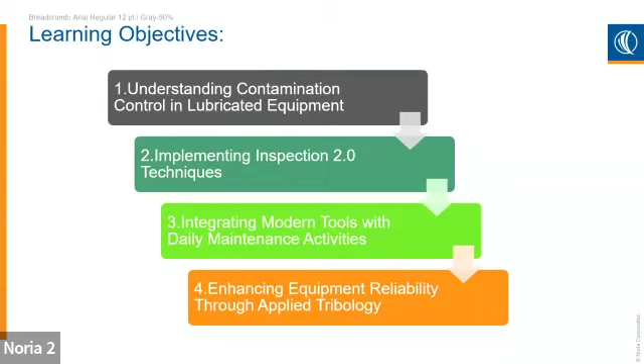One is simply understanding the role of contamination control. Contaminants, how do they impact machines? Next, I'll talk about what this Inspection 2.0 technique is about. Then I'll jump into integrating modern tools, everyday tools, things we can use that are in our own pocket that can be impactful and bring the next generation into these industries. And fourth is seeing how this plays a role in the overall reliability space, how applied tribology has a role.

But what is important for that next generation? That's the question. The next generation being those entering the workforce, or maybe have been in the workforce for 10, even 15 years, but are still transitioning to figure out what it is they want to do. How is it they want to apply themselves? Even those who have been through degree programs or trade programs, do they actually have the skills necessary to complete their job? Are they happy with their jobs?

We're going to have a need, and it's hard because that type of workforce isn't readily available today. Right now it is an average of 44 days between finding, looking, searching for that particular hire and actually hiring them. So that's the average, 44 days. And then you have to decide whether or not that's going to fit correctly.

But what is that next generation looking for? They're looking for, in their possible career, things that can help control their schedule. They don't want the wild cards of what's going to impact the uncertainties. Of course, they want safety. Safety has always been a critical component. We don't even recognize it until there is an event.

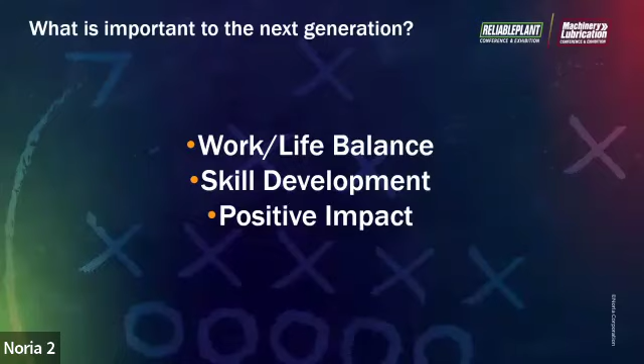This was a keynote session presented, like I said, to recognize the important need of our industry to see the needs that are different with the next generation, different than what was in the past. 50% related to work-life balance—50% of job seekers rank this as the most important.

That means when they're looking for their next job, whether it's pay, who the manager is, or the type of work it is, 50% of them said the most important thing was work-life balance. Making sure they had enough time to be with their families and have control of those components. The next one here was skills development.

63% consider this essential to career success, building their skills so they have something they can leverage moving forward. And that includes certification. Manufacturing workers who earn an industry credential, let's say a lubrication credential, earn $2,000 US dollars more annually and are more likely to be employed than those who didn't earn a credential. Think about that, and add that to every possible credential after that. That's a big deal for people to have that opportunity.

Reliability is a big part of this, and that's why I want to tie this keynote in. Reliability is a big part of this because technical advancements, technology can help with them adopting these tools, and specific certifications relate to that future growth.

So that's the third thing here: positive impact. 70% consider a company's social impact important. Again, reliability impacts this—reducing waste is a big component of this, especially when you look at CO2 emissions from what we're doing in industry. If they feel the role they're in is going to reduce that, they're going to feel happier about their job.

So what does that have to do with tribology? Why am I going on this tangent about the next generation in the workforce? Well, tribology does have a way of answering this, and I'll go back to what Noria does and why we even exist. Noria was founded on the premise that every plant, every facility, every mine site has a hidden plant that must be found. A hidden plant—I'll explain that in a second.

Actually, I'll explain it now. It relates to being able to uncover what things are being done every day, or money being spent every day, that isn't really amounting to any impact on the facility or any positive change on revenue. When the company makes more money, everybody else makes more money—producing more, faster, whatever it might be. If we can discover those waste components, reduce them, and increase the overall averages, then we're essentially producing a multiplier of what the facility currently is or was.

Could be times two, could be times three. We have case studies—I've seen this play out over and over, uncovering what's considered a hidden plant. Also, maintenance is the number one controllable expenditure in the plant. I'll talk about that a little bit.

Lubrication, or lack of lubrication, or the things that impact lubrication—this is the world of tribology again, applied tribology—is the number one cause of machine wear. Contamination and lack of proper lubrication is the number one cause of wear. I'm not just saying that—you can talk to any of the manufacturers of bearings, pumps, motors, gearboxes. They'll say the number one reason their components fail is due to some sort of mechanical wear, and the majority of that is contamination or lack of lubrication.

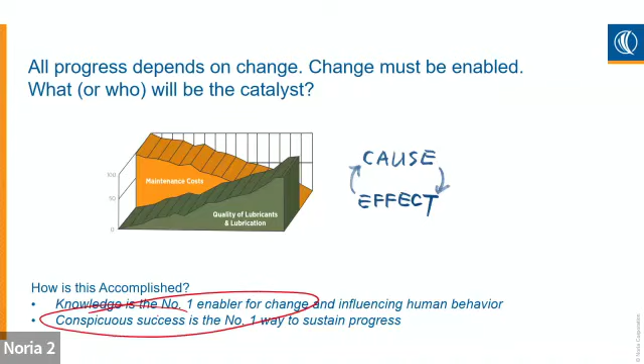Once you have success, the last thing here is about conspicuous success, and you see that down here. I think this gets underplayed, misunderstood. Conspicuous success means presenting your findings. When you have success with something, even small changes, this is important for the next generation, seeing the small changes, making sure everyone's aware of it. Because if it's not showcased, then there's not going to be the additional investment of time and resources to make that grow even further.

I'll explain some scenarios about that coming up here. But that's the long game and how to keep things sustainable. Showcasing that conspicuous success is the number one way to sustain a program.

So take a step back. Let's talk about tribology for a second. We'll have a little bit of a Tribology 101 course, and then we'll get into contaminants, contamination control.

Tribology is the study of lubrication, friction, and wear, and the lubricant is reducing that friction. But let's not forget, friction is also considered a good thing at times, like the way our tires brake on the road and keep us from sliding all over the place. That's friction that we like.

But at the same time, as you're driving, you're experiencing drag, all the air around you slowing you down. That's something you're trying to reduce. So friction's both a good and a bad thing depending on the context, and we just need to recognize it as part of the equation.

Understanding that friction exists and lubricants can help, what else impacts that? Well, it's impacted by the motion, the type of speeds, whether it's sliding or rolling motion, the temperature. As temperature goes up, the viscosity goes down, the oil thins out, and that's a big deal. The load on the equipment, the overall operating environment, the shock loads, and the type of lubricant and the way the lubricant's being applied.

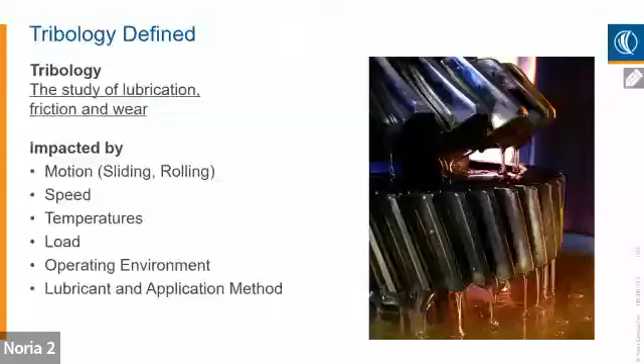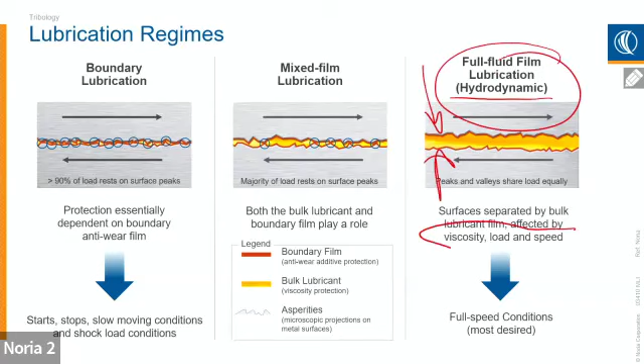When there is lubrication in practice, the most effective form of good lubrication is what we call hydrodynamic, or there's also elasto-hydrodynamic lubrication. When that occurs, you have full separation of components. These surfaces are moving relative to each other in a careful balance between the viscosity and the load and the speed.

But under certain scenarios where the speed is too low, or the load is too high, you're going to have a collapse of those two surfaces. The viscosity can't really do enough there, so in exchange you're working with the additives, the wear and friction control additives. If you've ever heard of anti-wear additives or extreme pressure additives, these are the type of additives that protect and provide what we call film strength.

Film strength is how the lubricant protects surfaces by means other than viscosity. That's also known as boundary lubrication, where these additives, anti-wear additives, play a role. They don't prevent friction altogether, but they help reduce the effects of it.

Now, all the while, you see that these surfaces aren't perfectly smooth. That's totally normal. Under these conditions, the gap between these surfaces is at a size we can't even recognize with our own unaided eye. We're looking at 1 micron or 2 microns, or half a micron in rolling element bearings. We can't see things individually without a microscope or something, that's less than about 40 microns.

We can't even picture it—our hair, for example, is about 80 microns, so it gives you an idea. We're talking about something almost 1/100th of the thickness of our hair, and that's the film thickness that is protecting our machines. It's the difference between having perfect lubrication and a machine that's smoking, burning, frying, and leading to immediate failure, based on a lubricant at that depth.

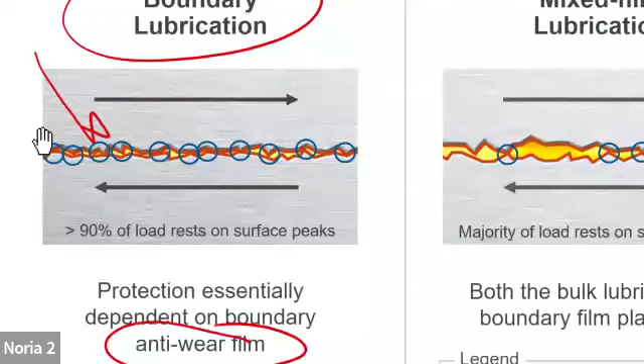The solid, maybe dust and dirt that's even in this room right now, we can't even see because of that same reason. It's too small, but it's still bigger than that film thickness. So it gets into that oil, and this is happening blind to us. Yet it's causing this sandpaper wear, wearing down of the machine surfaces, and it leads to wear. So we have to recognize that and provide good lubrication to overcome it.

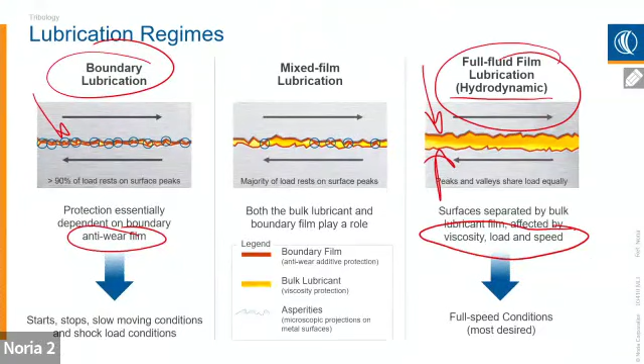So things like good lubrication, things like contaminants, and then the need to control that. Those are the top reasons why machines fail. I'll jump ahead a few slides here and show that. The Pareto principle, if you've ever heard of it, is also known as the 80-20 rule. It's used in a lot of different ways.

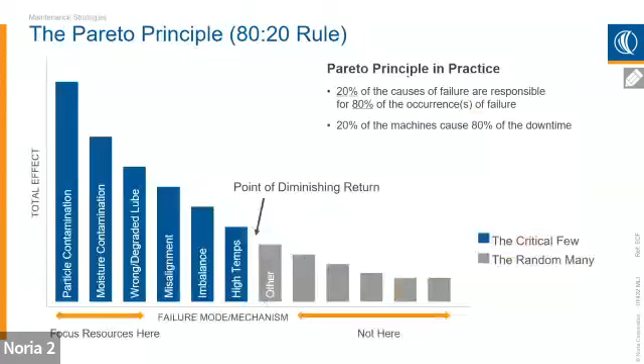But one of the most impactful ways it's looked at in our industry is that 20% of the causes of failure are responsible for 80% of the occurrences of failure. Of all the reasons why machines fail, and that's actually shown here in blue, 20% of those are responsible for 80% of the occurrences.

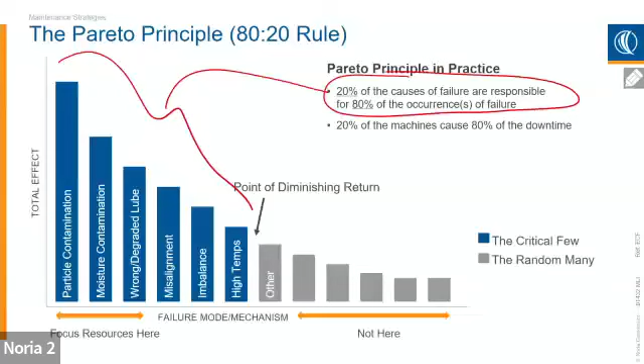And across all those averages, it adds up to being particle contamination, moisture contamination, wrong lubricant, degraded lubricant, and then eventually misalignment, imbalance, and the list goes on. There's eventually things that continue to add up to other reasons why machines fail. But contamination's there as number one, and then lubricants right there behind it. So I say that because it is necessary to observe that as a root cause of failure.

Now, many of you, I'm not sure what all your roles are in your organization, but I have to imagine you have a familiarity with condition monitoring and the several technologies out there to monitor the conditions of our machines to predict when machines will fail. That's predictive maintenance. Predictive maintenance, like vibration analysis, and others like thermography, acoustics, motion amplification, are all very critical at telling us that the machine is experiencing a failure mode.

But that is also the problem. It's telling you when there's a failure, not necessarily what will lead to a failure. And so that's what leads me to talk about, if you haven't seen it already, something called the P-F interval curve. This P-F interval curve represents the time domain between the time in which the failure is first detected and the functional failure. The functional failure is when the machine is not able to really do its job anymore.

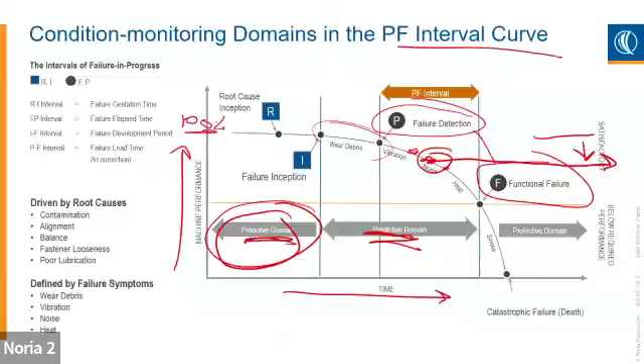But ahead of all that, lubrication can also be the answer, because proactive maintenance in this proactive domain is different than the predictive domain. Predictive maintenance looks at the failure in progress, but the proactive domain looks at the root cause and attempts to fix the root cause before the wear ever begins. So proactive maintenance is root cause oriented, meaning we're looking for particle contamination. We're looking for changes in the fluid properties that, if we leave them that way, will eventually lead to wear.

If I were to take that pump, which let's say is perfectly lubricated, and I take a glass of water and pour it in that pump, it's not failing immediately, but it will lead to failure eventually in the near future. But if I were to inspect a sight glass, let's say, and see that there's water in there, I can fix that before that ever happens.

So that said, this is all different types of wear and friction that can take place. But what are the economics behind all this? Where can the next generation capitalize, using tribology to their advantage? Well, a typical maintenance budget, there's a lot of different things that go into it. But the biggest part of it is the maintenance, labor, and repair parts.

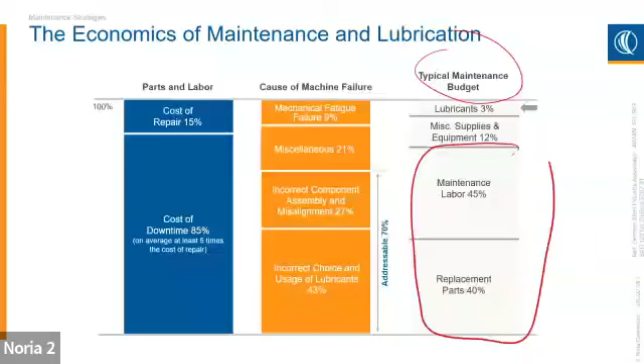That labor and repair parts are a big cost, but the majority of the impact of that failure is the downtime. On average, the downtime cost is at least 5 times the cost of repair. And so you have this maintenance budget that's significant, but at least 5 times that is the downtime. Well, why are these machines failing? Why does it lead to the need to have repair parts and maintenance available?

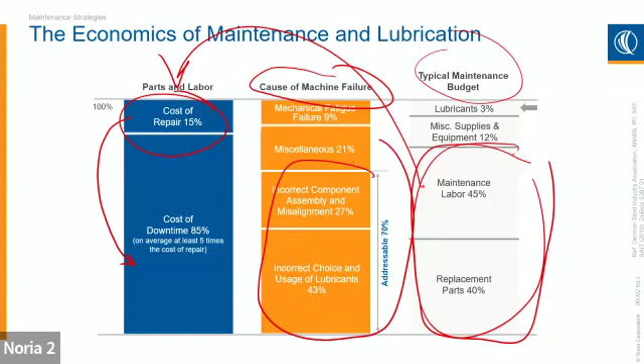It could be miscellaneous, it could be mechanical fatigue, it could be incorrect component assembly, it could be incorrect choice or monitoring and usage of the lubricants and contaminants. If you were to analyze which of those causes of failure are addressable, 70% of those causes of failure are addressable. 70% are the ones on the proactive side or the root cause oriented side, something that we can do something about.

So once again, applied tribology is about recognizing the impact that lubricants have to reduce or minimize friction and use friction to your advantage eventually, all to reduce wear as well. It's a concept that doesn't come intuitively, but it's fundamental to the industry as a whole. But it's simple stuff that can be applied. That's why the next generation can take this and answer a lot of needs here and make their careers a success as a result.

So root cause oriented, well, the name itself kind of helps explain what this is about. You think about the root of a problem or the root of a living plant. If you were to pull the plant from the roots, then you will essentially help eliminate the problem, or eliminate the weed from growing back. Versus cutting it from the stem right here, maybe you get lucky and it doesn't come back, but more than likely the problem will repeat. You'll have what they call the 4R treatment, where you have to repair it, replace it, rebuild it, remove it. Things will have to be done over and over.

And there are symptoms over here. These are all symptoms of a failure. One of these you see right here, like it's running hot. If it's running hot, let's say this electric motor, I can probably move the camera a little bit. So this electric motor, if it's running hot, that's going to start reducing the lubricant film. We're going to have an impact on the energy consumption. And this electric motor will fail sooner, even the lubricant will break down faster based on the Arrhenius rate rule and other chemical rate rules that suggest that chemical reactions happen twice as fast for every 10 degrees Celsius increase.

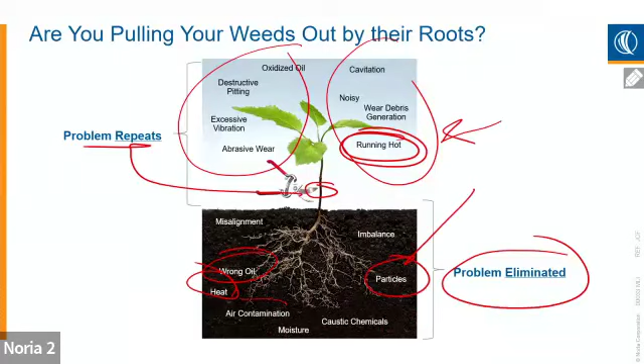But the real answer could be a lubricant issue, could be a contaminant issue, could be contaminants in the lubricant, or it could be on the outside, getting in between those fins and causing it to not have good heat exchange outwards as the heat gets generated. If we only address the symptom and put a fan on it, the problem will repeat. But if we focus on the root of the reason, the particles, the wrong lubricant or external heat from some other source, then the problem will be eliminated. And that's what we need to focus on.

So conditions of the root cause, and that's related to contaminants. That relates to maybe misalignment and imbalance, external high temperatures, incorrect things about the lubricant. Those are all root cause conditions. We call that proactive maintenance. Not we, but everybody calls that proactive maintenance. That focuses on the root cause.

There's technologies that help with that, of course, but oil analysis is a big condition monitoring technology that focuses on that. But just even doing sight glass inspections can tell us if something is going wrong there. The benefits sought are a fault-free machine, life extension, and the number of failures overall will be reduced.

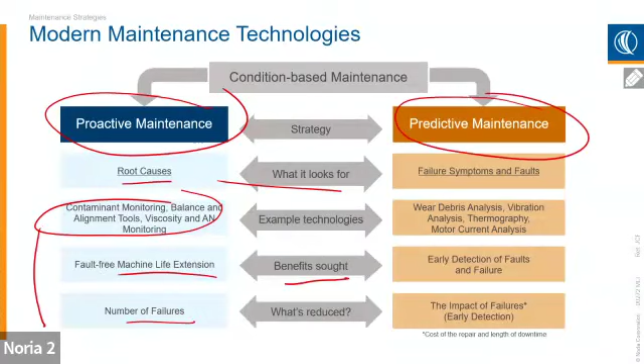Recognize how this is different, though, from predictive maintenance. Predictive maintenance looks for the failure symptoms. Great. We want to know when a machine is failing. Wear debris analysis helps with that. That's great. Vibration analysis is great. Helps us recognize when a failure is happening, and we can have early detection. That benefit sought is an early detection of that fault. And when we detect it early enough, the impact of that failure is less.

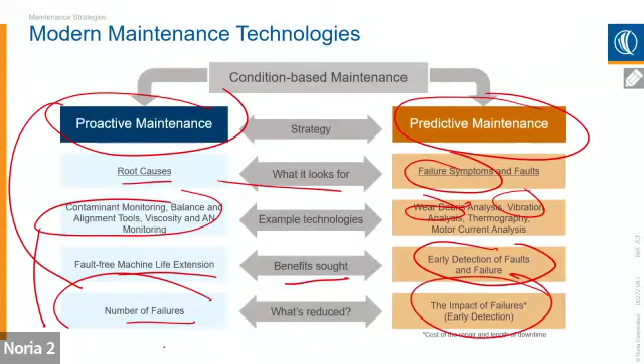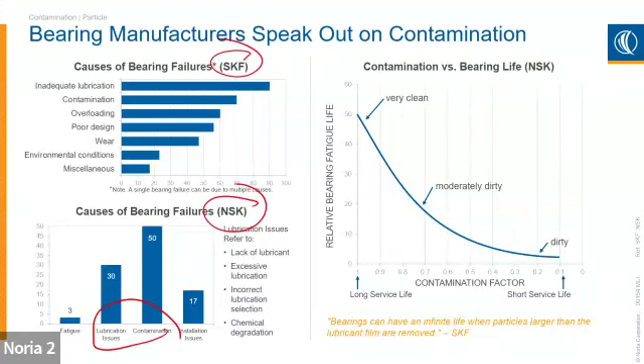Like I said, if you even look at the bearing manufacturers, what do they say? Well, here's some data from SKF. Here's some data from NSK. SKF went as far as to say, with lubrication and contamination as the top reasons, their bearings, the largest bearing manufacturer, I believe they still are, their bearings can have an infinite life. They can last forever when particles larger than the film thickness are removed.

Think about that. I'm not sure if anyone's going to speak up and tell me their thoughts on it, if they're brave enough and share with me what you think. But that's a pretty bold statement. Their bearings can last forever if all particles larger than the film thickness are removed. Anybody have a thought on that? If not, it's okay. So think about it.

Film thickness, I mentioned earlier, is often, for rolling element bearings, less than a micron. So the idea of removing all particles larger than that film thickness, it's not impossible, but it's definitely impractical and not even cost justified, because there's a lot of effort in that. But that said, there's still an important message they're trying to say there, that the less contaminants you have in the machine, the longer the bearings will last, period.

So where is that break even? When can we address that? So contamination control is the applied tribology that's really easy to execute on. It's just a matter of awareness, explaining the why behind it. So that's why I have a strong belief, and I've seen it, it's not just a belief, there's evidence. It's not circumstantial, but it has to be recognized, so that the next generation can focus on things related to lubrication and contamination. I'll even talk about inspections here in a minute as a way to solve these needs and have an opportunity.

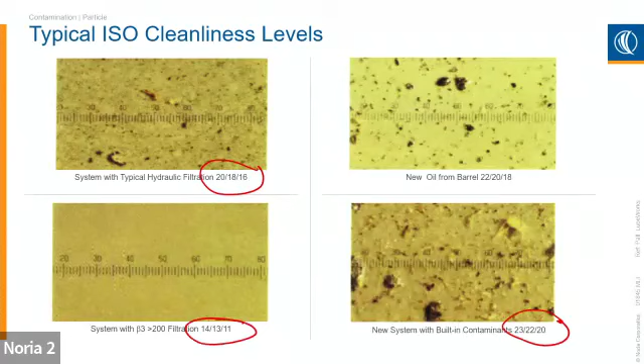So when I say contaminants, what am I talking about? Here's typical. If you've ever seen ISO contamination codes, this is a way in which we measure contaminants in an oil sample. That number, 20/18/16, it's above what we want. It's too much contaminant. 23/22/20, that's too dirty. A good number here is like 14/13. But how much does it take to make an oil dirty?

If I was to take a drum of oil and it was perfectly clean, so 55 gallons or approximately 208 liters of oil, assume it's perfectly clean, and I was to take an aspirin tablet and smash it up into small little particles, the equivalent of that volume of particles, and put it into that drum of oil, that is 1 part per million, or equivalent to an 18/15/12 ISO code.

That's already too dirty for most turbine systems, most hydraulic systems. These are components, machines that are sensitive to contaminants. But the reality is I could take that aspirin tablet, smash it, and throw it in the air, and it will turn into a fog and disappear.

No one will ever see it because the individual particles are so small. In reverse, those particles are already in the air, floating around every day, and that can accumulate anytime we leave lubricant drums open or have machines breathing without a good breathing system. All of this is impactful. As lubricants cycle through a pump in a hydraulic system, even if there's a filter, if it isn't removing more particles than are coming in, the system will always get dirtier and dirtier. Recognizing that contaminants will continue to invisibly destroy our machines can be a huge factor.

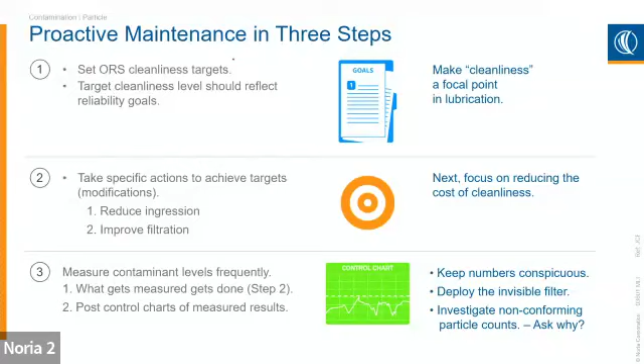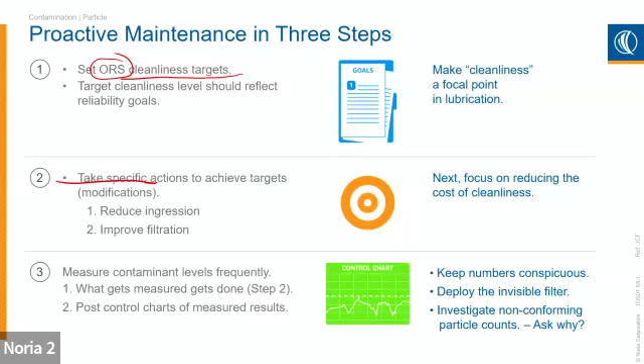Proactive maintenance can be distilled into 3 steps. First, setting targets—we can use ISO codes. ORS stands for optimum reference state; you can look that up online, but it's really about focusing on what's optimal rather than what's maximized. Every machine, based on its conditions, has a different target for how clean it needs to be. Second, take specific action to reduce ingression and improve filtration. Third, measure the contamination level—what gets measured gets done. That might require a particle count or sending it to a laboratory. But before any of that, you can't just say 'I want to clean up my oils'—you need a target, and you need to know how clean or dirty your oil is.

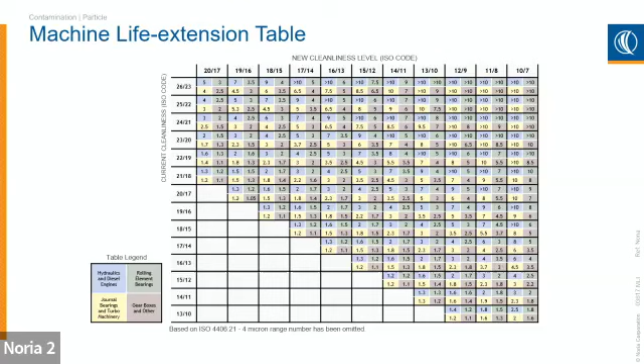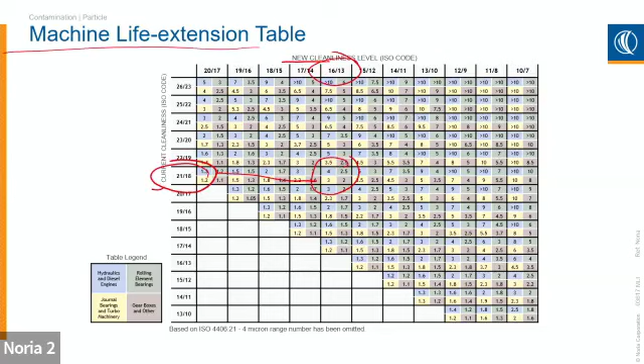Are you taking good samples to know how representative they are? If your current cleanliness level was at 21/18, that's not very good—that's a highly contaminated oil sample result. But if I took that down to, say, 16/13, this chart represents the machine life extension. Connecting those two points—from current cleanliness to new cleanliness level with better filtration—the blue line represents a hydraulic system or diesel engine experiencing 4 times the life out of that machine, due to particle removal and keeping particles out of the oil.

How do you remove all those particles from the oil? Well, you can have a filter—I have lots of filters over there—and have the oil go through it. But are you going to put that on every machine? Some machines might need it because it's critical. Others you have to balance with other solutions, because it's cheaper to keep contaminants from getting in than to remove them with a filter. The cost of excluding a gram of dirt from oil is probably only about 10% of what it'll cost once it gets into the oil. So good breathers, good seals, minimizing wear generation, and making sure new oil is clean—that's a tenth of the cost compared to once it's in the machine.

And once it's in the machine, for critical machines it might require good filters as well. There's a balance—it's kind of like caloric balance. You burn calories, you consume calories; I might go to the gym, but if I consume more calories than I'm burning, I won't get the results I expect. Same thing with contaminants: if I'm letting in more contaminants than I'm removing—because of small or missing seals, or a poor breather—it won't be in balance. Most machines need to expand and contract with pressure, so there will be a need to pull in air from around them. If I'm consuming more contaminants than I'm removing, it's not going to be in balance.

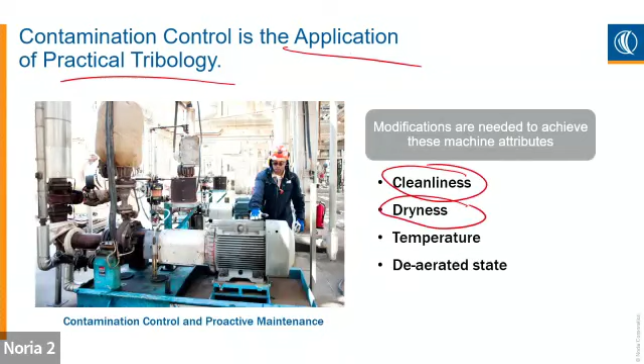Dryness relates to keeping moisture out of the machine, helping to reduce the temperature. I think that's a little more intuitive to most of you. De-aeration is about keeping oil that may be circulated from entraining air inside the oil. That can cause a lot of damage to the machine, including cavitation wear on pumps and journal bearings. These components can wear from the most unexpected causes, even air bubbles in the oil. There's a lot of things we have to protect against, and that's all about proactive maintenance.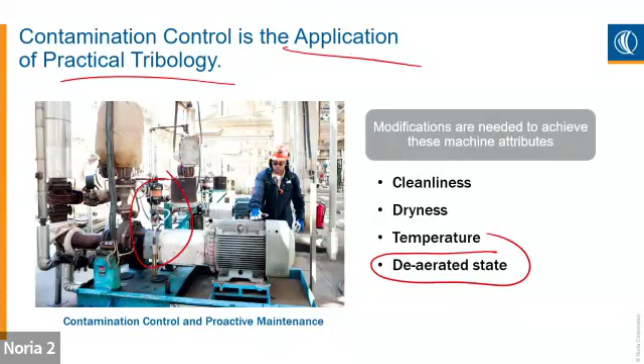So we can catch these faults. First we can keep them from getting in there, but once they do get in there, we can monitor the possibility of it inside the machine through oil analysis, through visual inspections, through sensors and other technologies. This is where the next generation can recognize the opportunity with applied tribology.

Catching faults proactively—interesting, because when we say catching a fault, the fault is a machine that's already experiencing a failure mode. Whereas proactive maintenance is supposed to uncover that before the failure ever even begins. And if something's going wrong with the oil or something's in the oil, it doesn't mean the machine's failing. So it's hard for a machine to fail without the oil knowing about it first.

That's the message here. We can see what's happening to the machine by seeing what's in the oil itself, just like when you do blood analysis. You take a blood sample—you go to the doctor, they take a sample, and you feel fine, everything's fine. But yet the results come back and say, hey, there's some things going on here and here and here. I wouldn't know; I'm not feeling those effects, but there's an indicator of something in my body or a change in my body that will lead to those effects. The same thing can happen with machines.

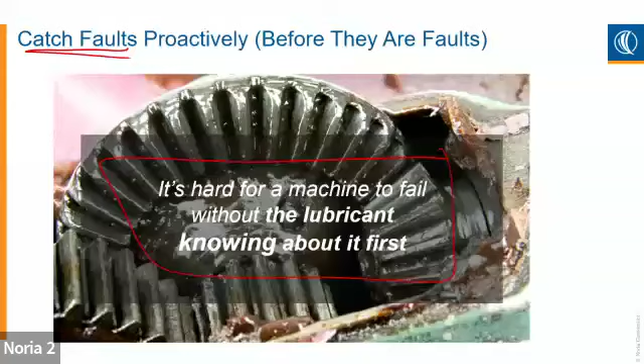But same thing with inspection, just making observations. All right, so you see this image. This is inside a hatch of a reservoir. There's a lot of reportable conditions here, things that are wrong inside this sump. Would you be able to report them? All of the 10 reportable conditions. Would your laboratory, your oil analysis laboratory, predict and find—well, not predict, but find those conditions?

Or your vibration program? When you see this, you might see a few things that pop out to you, but I'm only asking you to find it—whether or not that's the case every day when a machine like this is in service and someone walks by.

Maybe some of you are familiar with—I got 2 young kids, an 8 and a 5-year-old. My 5-year-old daughter loves Highlights magazines. I don't know if you know what those are. They come in the mail, and they have a whole bunch of kid stories, and they have some pictures like this.

These pictures are a find and seek. You're trying to find the little objects. There's lots of objects in this picture. Do you see them? And if you're looking at this, do you find hidden objects? I'm not talking about the obvious raccoons, but things that are more hidden. You don't have to answer, but look at it. Think about how many. Do you see 1? Do you see 2? Do you see 5?

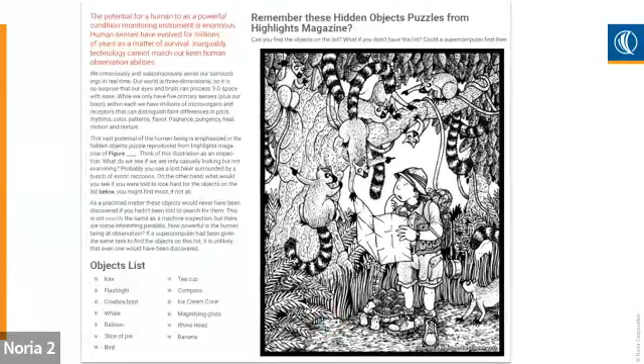So going back to this image here, if I was to then say, okay, here are the objects to look for. There's a kite, there's a flashlight, there's a cowboy boot somewhere, there's a whale. And you're like, what? How's there a whale? A balloon, a slice of pie, a bird. There's the bird there, remember where that one's at. Ice cream cone, and so on. There's several objects here that you can't see unless you start to recognize what to look for, right?

Now, what if I took this further and said, okay, here is an example of the picture or the object? I just gave you a list. What if I took it further and said, this is what the pan looks like, this is what the balloon looks like, and the whale looks like? You'll be able to recognize. This is very basic, simple stuff that maintenance teams can do for a new generation that don't have to really have 10, 20 years in a job. I can teach someone in 3 hours how to inspect their machines and what to look for.

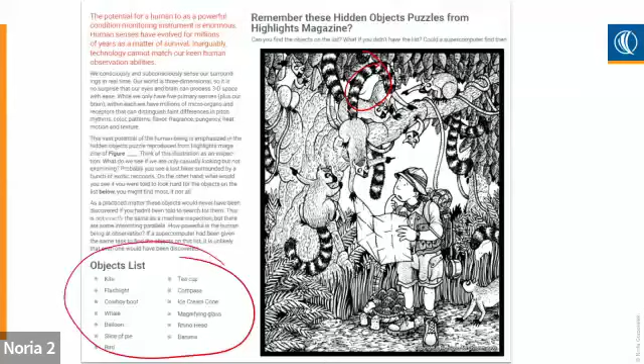And then they can make huge impacts in uncovering issues and show the why behind it. So going back to even this right here, can you see those 10 reportable conditions?

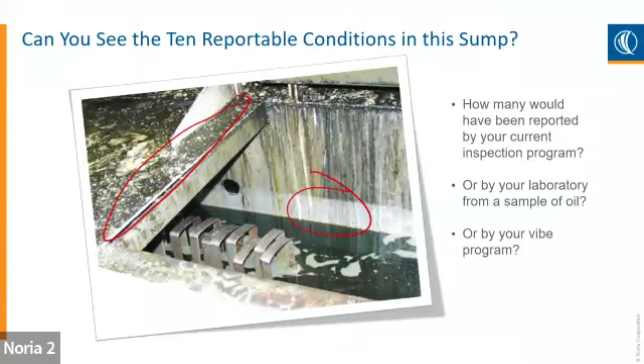There are 10, there's a lot of things. Why is the level low? There's a difference here in the impact the water had at a higher oil level, resulting in varnish. And there's all kinds of... There's no gap here, there's no gasket, I mean there's rust down here. There's aeration, there's several more. If you want the whole list of the 10 conditions, you can email me later on and I will be happy to show you the whole list.

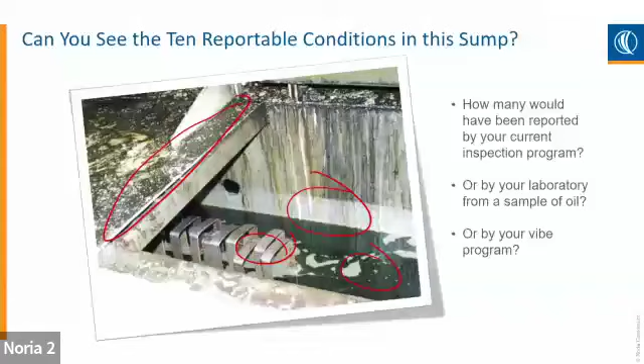This whole exercise I'm telling you comes from a yet to be published book called Inspection 2.0. It's a huge book, it's going to be almost 1,000 pages of detailed images on what to look for in different conditions of different machines and the why behind it. What does it mean? How does it impact reliability? But everyday things, the opportunity of a well-trained human-based inspection.

Consider just the observations of this gearbox. What is it there that the person can find on a level gauge, on the bottom down here or the top? What is there to look for? What if the inspector isn't told or trained what to look for? What would he or she find? What would he or she miss? There's a lot of gaps there.

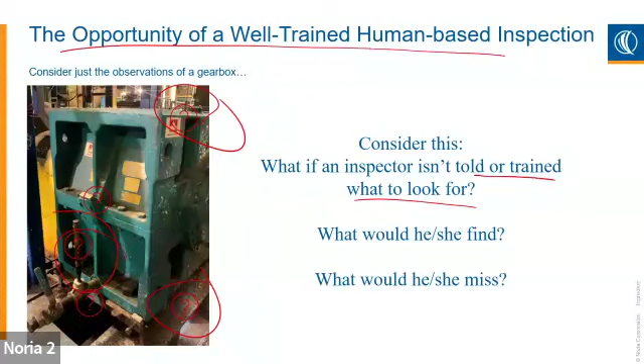The experience and the mindset of a detective needs to be emphasized as intentionally looking for the clues associated to the cause and the effect of failure. That's what they need to look for. So let me go to this.

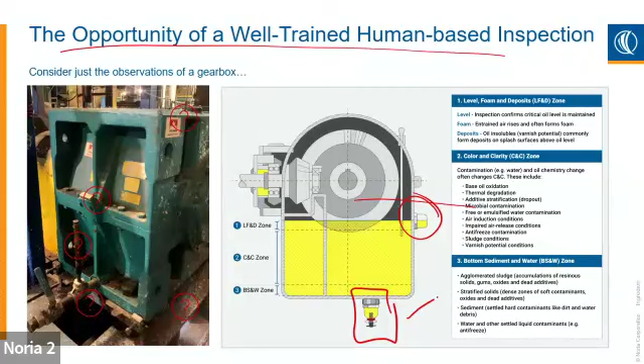This is a breakdown of how, once you have good sight glasses or a device here called the bottom sediment and water bowl, it's a very well established, proven inspection device that you can add to a gearbox, a pump, or a reservoir to look at things that are heavier than the oil, such as debris that falls down or water. That's why it's called a bottom sediment and water bowl.

But these don't come on the machine by default. You have to add that to the machine afterwards, you have to modify it. Yet there's this idea that when you buy a new gearbox or a pump, what the OEM has done to outfit it, you don't touch it. That's what they think, you want to keep things the way the OEM said it should be. Part of it might be the warranty, but part of it is a lack of understanding that it's not necessarily modified the right way. But there's a lot of things from an inspection.

So we're getting into that inspection topic here, Inspection 2.0, the daily inspection, the things to look for. And it could be a lot of different things you're looking for. We call it the daily 1-minute inspection, because once you're trained properly on what to look for, and this is just a few of them, 13 of them, they can happen real fast. Just like a crime scene investigator, the majority of the data they're going to find is going to happen within the first 30 seconds because their eyes are tuned to what to look for. After that, it's just a matter of validating and showcasing it. There's a lot of data here.

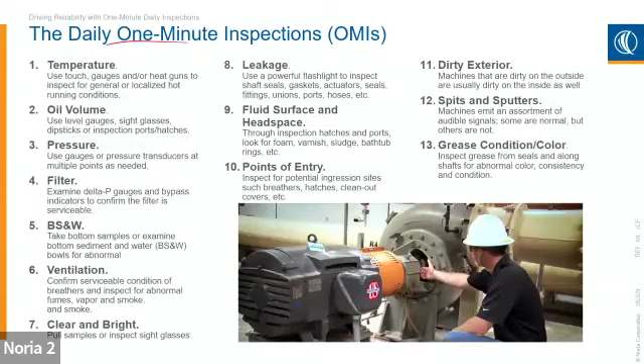Best practice is to reduce the subjective elements of an inspection. One of the biggest issues with a visual or sensory based inspection—what do I see, feel, hear—is that it's subjective. What Stephanie or Guy or Martins or everybody thinks about an inspection on a particular machine might be different, especially from what I think, so we're going to see things differently. That's subjectivity, and that doesn't play well when we're trying to make objective decisions.

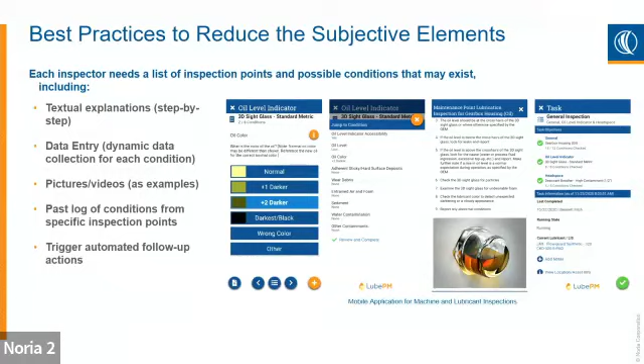Converse to that, vibration, acoustics, and thermography give us objective data that we can utilize and watch the trends. So the opportunity is to take what we do every day with our own senses and turn it into a more objective observation, utilizing tools to collect through our senses and provide explanation on what to look for, what's considered normal and abnormal, and let those results trigger automatic follow-up actions—just like it is in oil analysis with trigger follow-up actions if certain things happen.

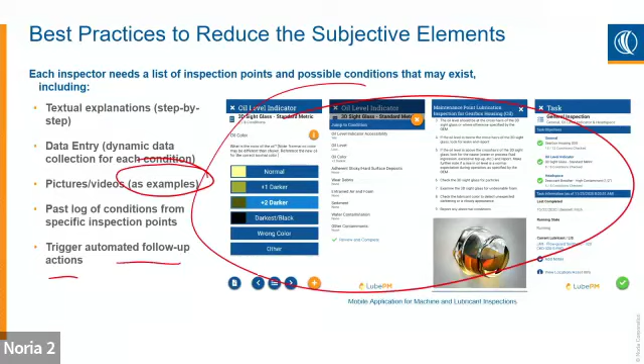You need to have the right tools that tell you what to look for and how to report it. There's a lot of different types of things you can look for, even on a typical gearbox.

There's over 120 different inspectable conditions on an average gearbox, and only about 10% of those are intuitive—that's something that my 8-year-old son could determine on his own. The other 90%, it takes skill. It takes being trained to look for certain things.

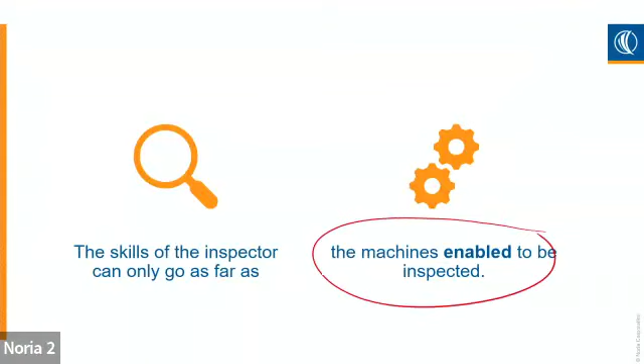Even on the sight glass, there's lots of different conditions. So the skill of the inspector matters, but the second thing here is not just the enablement of the inspector himself to be trained and skilled, but also to let the machine be inspectable and put things on there that can help with that inspection.

Unfortunately, sight glasses are not all made equal. There's all kinds of colors, shapes, and sizes, and sometimes they look really good where you can see the oil very clearly—you can determine what's in there that shouldn't be. Other times it's just a black mess or confusion, and that's unfortunately way too often.

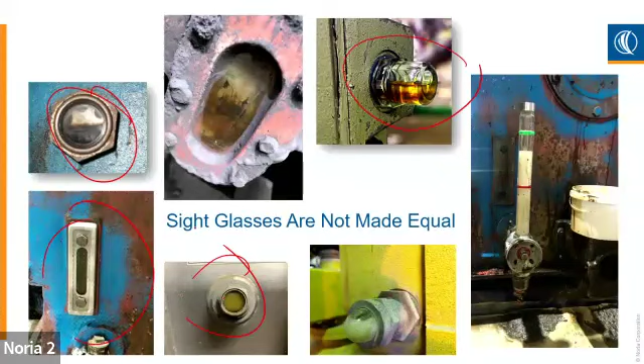This inspection can happen every single day by anybody walking by. But for decades now, a typical magnetic plug on a drain port has been the go-to solution for a drain port, and you can't even inspect that until you actually pull the drain plug out. With this, you can see it every single day.

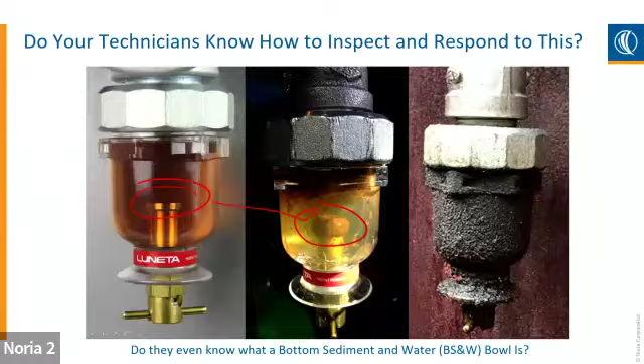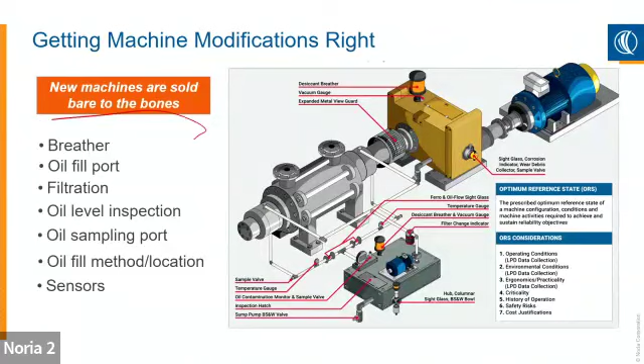New machines are not sold with the right things—they're sold bare to the bones. That's how manufacturers try to get market share, by reducing their costs, unfortunately. So there's a lot of different things, whether it's a breather to reduce contaminant ingression, better filtration, or better ways to add oil with, let's say, a quick connect that can help enhance the application of the lubricant without letting the air around it contaminate the process.

The fundamental piece of all this is recognizing the plant around the equipment is filthy. There's dirt everywhere that will damage our machines, but we're blind to it. We're not just creatures of habit, but we also rely too much on what's intuitive to us—I'm guilty of that too. If something doesn't make sense to me, if I don't see it in front of my face, I'm probably not going to act upon it very quickly. So you have to make things easier to understand, or educate people where it may not be clearly understood without the underlying principle being understood. So, applying tribology.

Bennett, we have a question from Martins. I don't know if you can see it there. Oh, I'm sorry, let me see where I can pull it up. No worries, if you want I can read it out. Yes, please do.

Okay, it says: in what ways can we quantify the financial impact of doing oil analysis to monitor lubricant condition in order to improve equipment reliability and get management buy-in? There's probably three or four questions here, but I'm hoping I can help answer this one already.

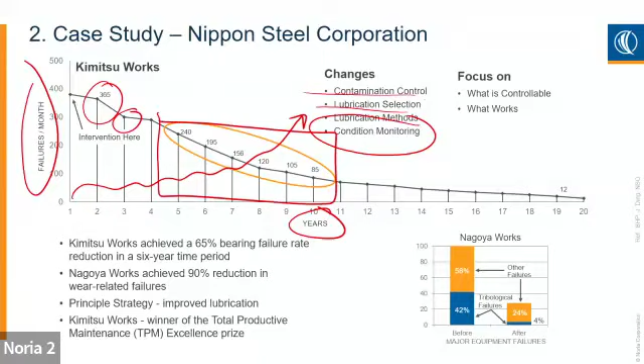And some people like the overtime, sure, but the new generation doesn't necessarily like it. The next generation wants to be able to have a good work-life balance. But not only does that help them and their ability to control their schedules, it also impacts the facility, being able to have more prediction on when things are going to need to be changed and proactively improving the equipment.

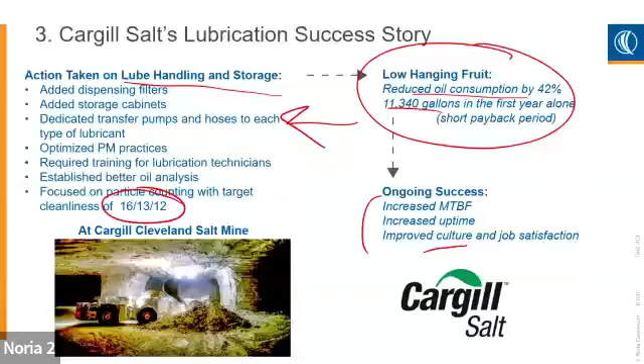The other component is the contaminants. So you need to track particles, the amount of debris, those three numbers, like a 16/13/12 that I was showing here earlier. That's called an ISO 4406 contamination code that needs to be tracked. And then we're also, on a predictive maintenance side, looking at the wear debris, the wear being produced as a result of the possible failure in progress.

And then you also say, can you share some lubrication best practices that can help with extending the life of the equipment? Absolutely. I'm already doing this with better identification of how to inspect a machine. Right now, there is an enormous amount of waste happening simply by everybody doing lubrication inspection rounds, but not having any idea what to look for. It's just based on their intuition. That alone, recognizing things that are important from a proactive standpoint, is huge.

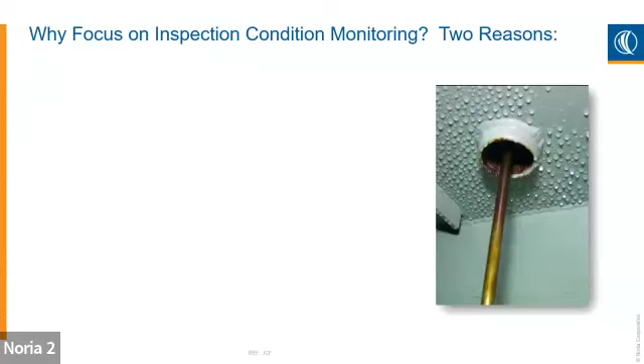So I was speaking on applying tribology. This is a key to enhance reliability. That's Noria's mantra, recognizing the impact lubrication excellence has on achieving plant reliability, or in creating a reliable plant. So why focus on inspection? Well, two reasons. This comes back to the next generation concept.

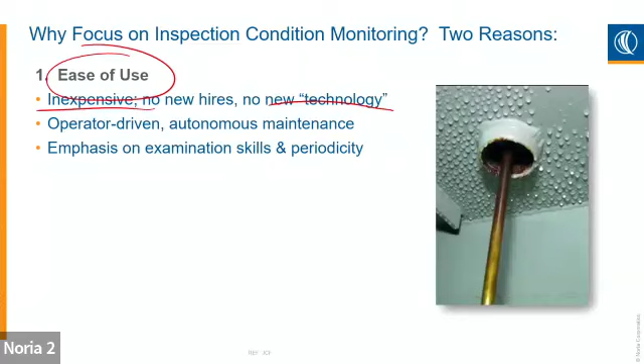One, it's easy. The ease of use, being able to implement better lubrication or inspection practices. There's no real new technology. It's a methodology. It's a thing that can be taught. And it's driven by those who are at the machine every single day. And in the process, it helps them learn about the machine so they can better relate to the operations. Let's say it's a reliability engineer who hasn't been in the maintenance world very long. He can learn about the machine by better understanding how to inspect a machine. And it's an emphasis on examination and doing it more often.

The other thing is the early detection, effective detection. You can cash in on the economics of finding things quickly, just like sensors. You put sensors on a machine for vibration and temperature. It's a real-time trigger. But that only goes so far, and is important too. Layering on top of that is the everyday inspections, or however the frequency might be, by whoever can be nearby. It could be operator driven on those inspections.

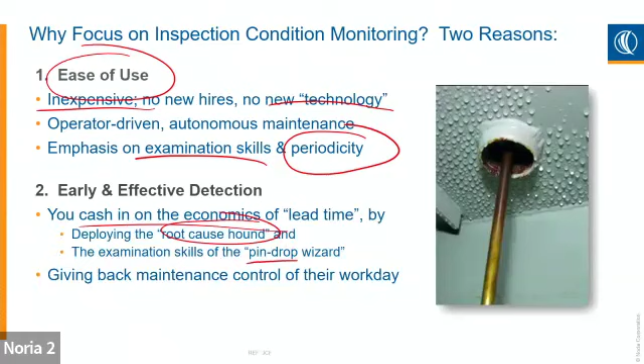And deploying the root cause hound, focusing on what the root of the problem is, the repetitive why. An examination skill of the pin-drop wizard, looking for the smallest subtle changes. There's so much happening in machines that I see picture after picture, even the picture on the right here, that everybody sees as normal. And it's okay. Well, maybe it's not okay. They know it's not okay, but they're approaching it like it's not critical.

Reliability. What does a reliability engineer do? Ian, I listened to an article from a guy in the UK a few months ago that had a great story about this. A story about him as a reliability engineer, and he was undergoing a surgery, and they were putting him under, so he was having crazy talk, and the nurse was talking to him as he was going through. And one of the questions the nurse asked is like, "What do you do?" "Oh, I'm a reliability engineer." "Well, what does that really mean?" Well, the guy couldn't even answer it. He couldn't spit that out.

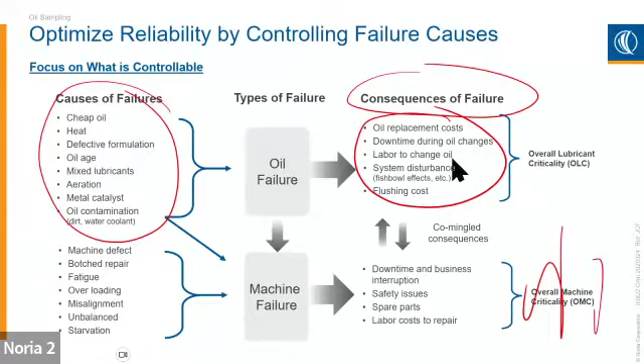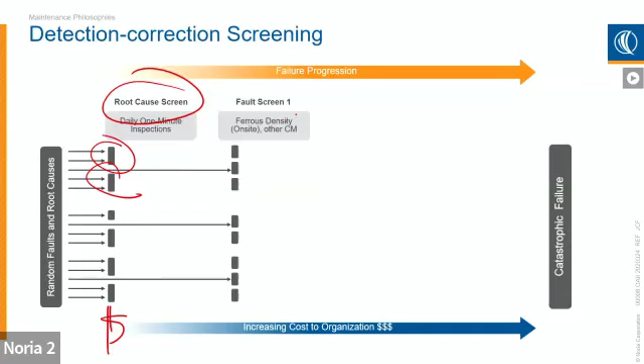So you have to have several ways to detect problems all along the process. Root cause first, every day, daily inspections. You're going to catch some of those. The cost to the organization is much less at that point. Then you can detect things through other screening, whether it's other condition monitoring or ferrous density. Maybe then a little bit later, as the failure is in progress, with elemental analysis. Then maybe vibration will catch it when the metal-to-metal contact is more significant. Once in a while, events will get through. But catching it over here is the lowest cost to the organization. This is the opportunity for the next generation to capitalize on the economics behind it.

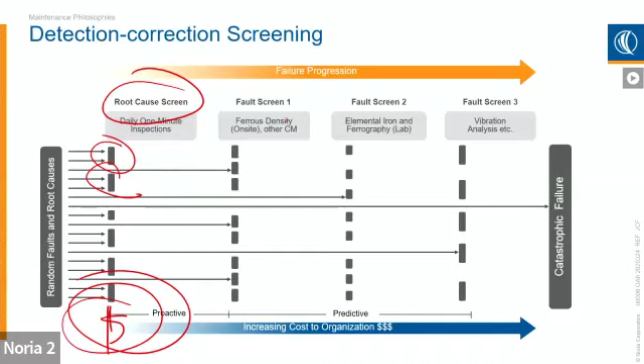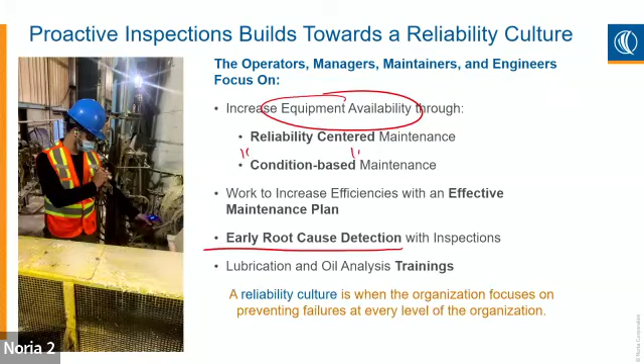A reliability culture is when the organization focuses holistically on preventing failure at every level of the organization. So we have to train people to look for things and understand the why behind better lubrication practices, even though they might not be living it every day. It could be you're asking, what are the things to look for that could help, look at the economics behind an investment and the return on investment. Here's a recent case study.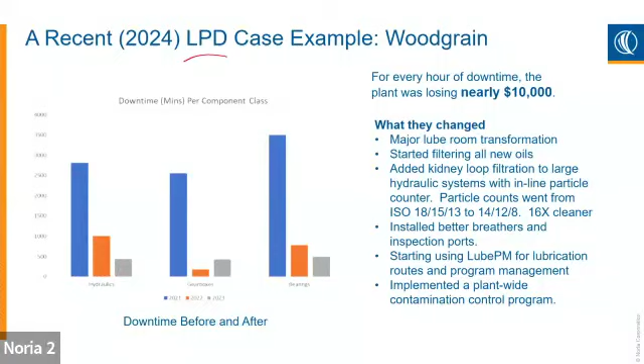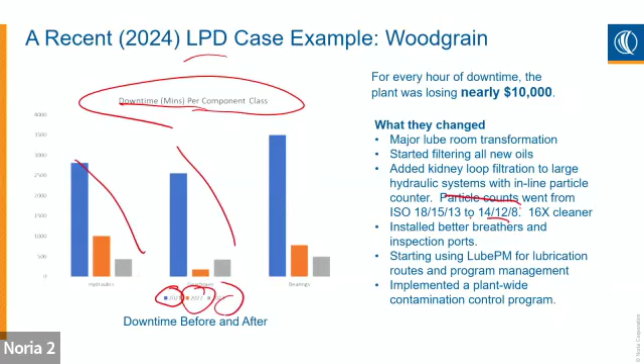LPD stands for Lubrication Program Development. Woodgrain was a customer in the United States here, and they were earlier on. For every hour of downtime, the plant was losing nearly $10,000. Every hour. Before, you can see the downtime minutes per component that they were experiencing on different components, and the years went on between 21, 22, and 23, before and after. What they changed, they focused on the things they could control on the lubrication and contamination control side. Particle counts, lowering those contamination codes, focusing on lubricant storage and handling, better filtration, kidney loop filtration.

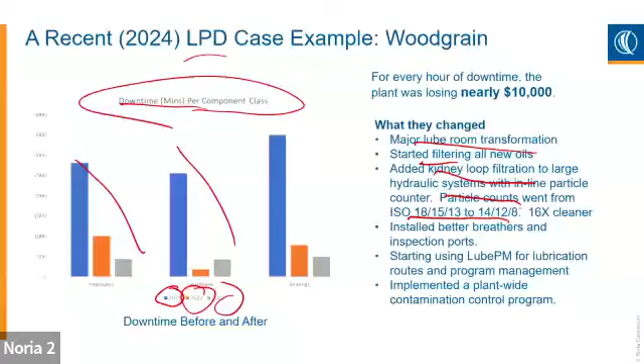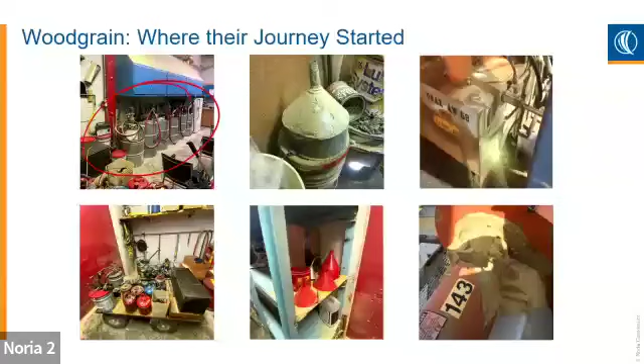They started using lubrication programs, LubePM, as a program to do their routes and do their inspection rounds. Even from the visual side of things, this is the before state, where things were just haphazard and disorganized. Even when it looked okay to some, like this looks okay to many people. But if you look at the details and how the lubricants are being handled, it's actually showing a lot of ingression of contaminants. And we don't want to use funnels, for example.

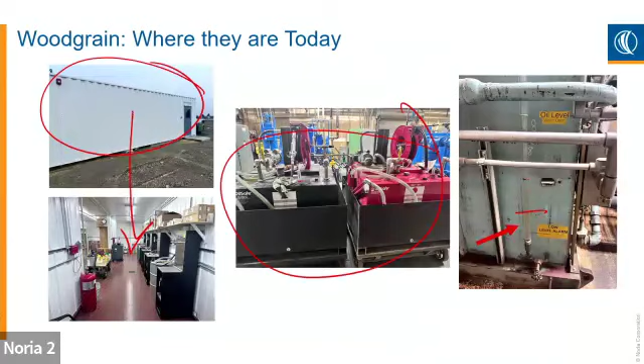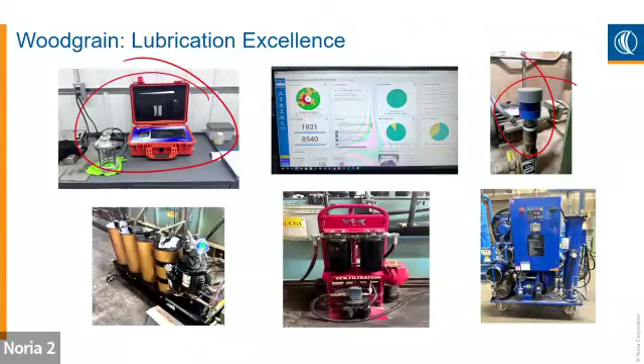Where they are today, they have a dedicated lube storage facility. That's what's inside. Filtration for every lubricant, large filtration units here, better understanding what the oil levels should be. They're using better tools. This is how you engage the next generation through applied tribology. These filtration solutions, these breathers, the software to monitor the lubricants in use and making sure it's being applied the right way. This is a particle counting device to monitor the contamination levels every day, even just ensuring that we have the right lubricant going into the right machine.

I already showed this case study, but there's more. There's lots of examples, and every one of these case studies, by the way, is found online. You can read the details, their charts, the data that they show, so that you can also follow their same steps on how they reached success.

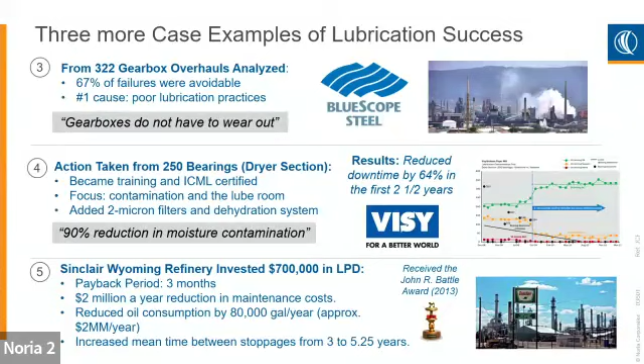BlueScope Steel: 67% of failures were avoidable. They recognized that gearboxes don't have to have a lifespan of 3 years or something. They can last 10 years. They can last 20 years. But there's often a mentality: oh, we've always had to replace those every 2 or 3 years. That doesn't have to be that. We can make a difference there. I think that's where the next generation can have an opportunity in their role.

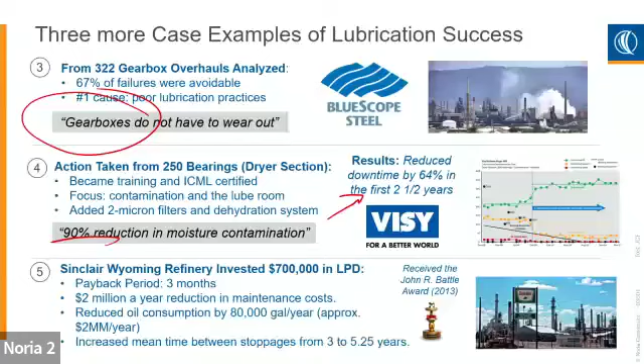Visy recognized that there's a lot of importance in training people on what to do and better filtration. 90% reduction of moisture contamination reduced 64%. That alone, 64% of their downtime in the first 2.5 years. And so on and so on.

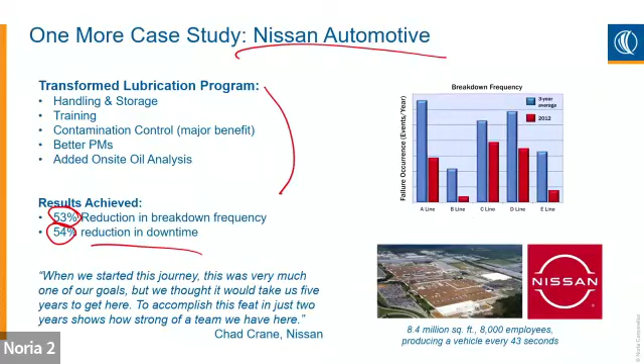Even more recently, I was going back to a facility, Nissan Automotive. They won a battle award about 10 years ago. The battle award is an award for the best lubrication program around the world. And I was wondering how they're doing. At the time, 10 years ago, they achieved a 53% reduction in breakdown frequency, 54 in downtime, all related to these things right here. This is Nissan, a major facility recognizing the role of applied tribology. So 10 years ago, they won the battle award.

I went back there in April of this year to see what they were doing, and I was blown away, not necessarily by the things on the machines or even how they were applying their procedures, but by the culture that had developed since then. They have a better work-life balance. Everyone knew their role. Everyone was having good job satisfaction, recognizing that their tactics with applied tribology were actually addressing the things related to the skills they learned, and they were making a difference.

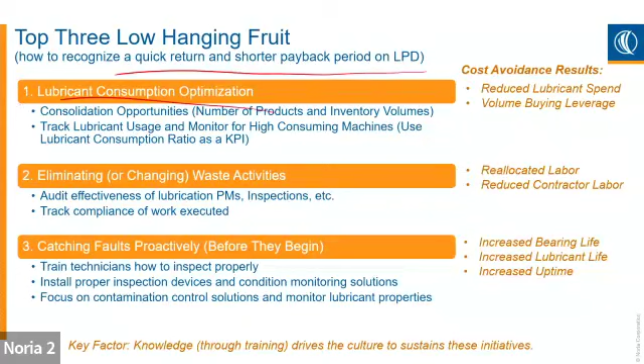So back to what Wes was sharing at Reliable Plant, the slides I showed at the beginning, this is seeing it in action. And there's plenty of articles and videos that showcase this. And there's lots of different kinds of low-hanging fruit that anybody can help to recognize for a quick return and shorter payback period on lubrication initiatives, whether it's just to get the cost savings, that return on investment. It could be lubricant consumption optimization, like I mentioned earlier. It could be eliminating those waste activities. And then, of course, my focus here has been about catching faults proactively before they begin.

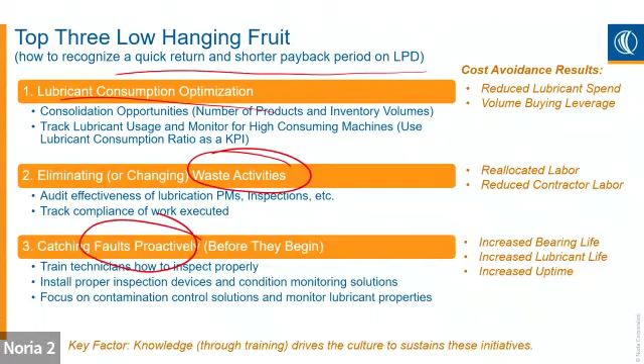But this all begins with knowledge. Every bit of this begins with teaching people the why behind machines that fail. Every day machines fail, and they think it's just the end of the machine's life, and they have to replace it. And downtime is inevitable. Well, maybe eventually, but it can be significantly reduced. So through training, this can drive that culture to sustain these initiatives that otherwise can be just seen as flavors of the month.

At this point, I would like to share a few things about Noria. Before I do, Ian, maybe it's a good time to go through some Q&A. Does anybody have any questions at this time? Absolutely, folks. Yeah, any questions at all, please give us a shout.

Now's your chance. I'll give you some time to think about it if you have questions. As you're thinking about it, maybe I'll share a few things about Noria that you may not be aware of, and then I'll come back and ask you one more time. If you're thinking about a question, you can write it in the chat. I see the chat behind the camera here, so I can look right at it if it comes up.

Can I ask a quick question? Yeah, go for it, Lisa.

You quoted earlier that lubrication is the #1 cause of machine wear and failure. How would you, obviously there's not official research, is this a Noria thing, like if we were to quote that, is it coming from you, or how have you uncovered that?

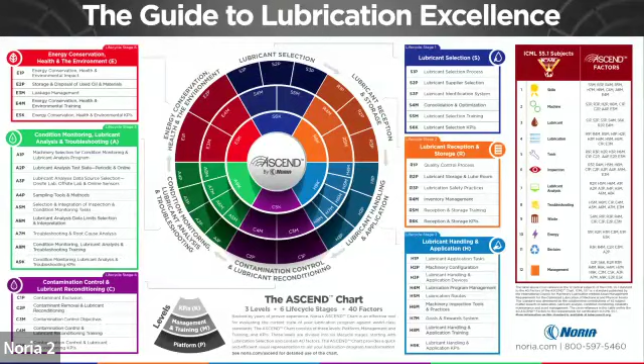Go on, Bennett. Ian, do you mind if I share one more quick thing? If anybody wants to look at this Ascend chart, just message me, email me, and I'll send you a copy. It's a great way to visualize all the components necessary in building a lubrication program. I didn't get a chance to get into it, but I'd be happy to share that with anyone that reaches out to me.